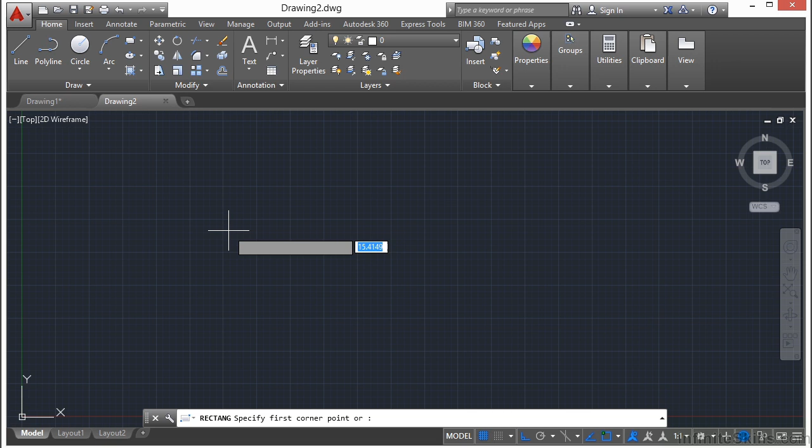Now we're going to start drawing a rectangle, and we're going to use the rectangle command. Just type in on your keyboard REC for rectangle. That's a little keyboard shortcut, and we'll talk about those again later on. This will be a way for you to use your commands in a shorter way so you can get to them much quicker. Press the Enter key. Now pick a point, any point on your screen, it doesn't matter where. That'll be our first corner for our rectangle.

Now we want to make this rectangle 50 units wide by 30 units tall. So you'll move to the right and up from where you first pointed. Type in the number 50, press the Tab key, that'll make it 50 units wide. Type in 30, and that'll make it 30 units tall, and press Enter.

Now take your mouse with the scroll wheel and double click that scroll wheel. This will do what's called a zoom extents. It zooms all the way out so you can see all of the line work in your file. If you scroll on that scroll wheel, that'll zoom in and out. You can also pan around in your file by clicking and holding that scroll wheel. So you're going to use that a lot: zoom in and out and pan, and the double click to zoom extents.

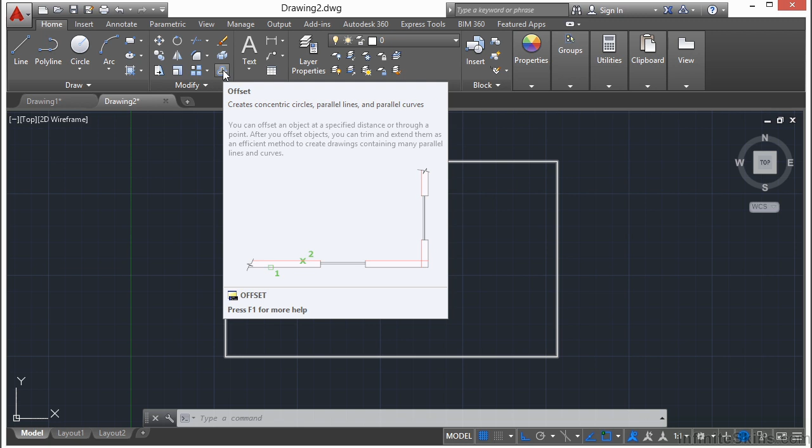Now we're going to offset this rectangle because we're going to build kind of a wall for a building here. We're just going to offset it 0.5 units to the inside. Come up here to the ribbon, go to the Modify tab, and go to this little button right here, that's called the Offset. You may have noticed that whenever you move your mouse over any of these commands, it gives you what's called a tool tip. It gives you the name of the command that icon represents.

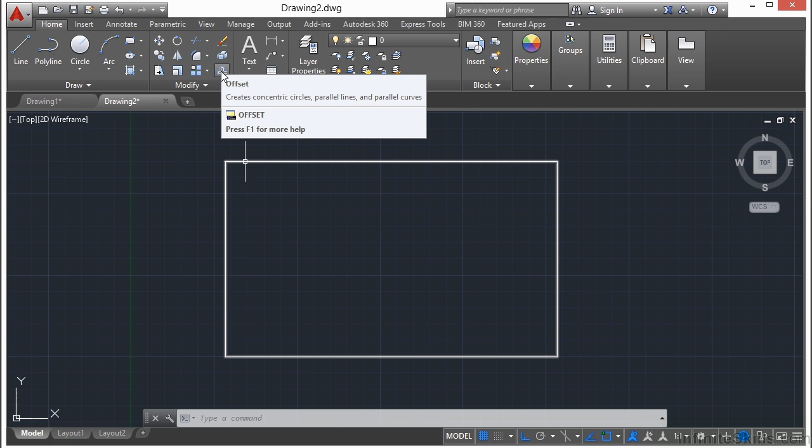If you wait a few more seconds, it'll give you a little tooltip telling you kind of how to use that command. So if you don't know what any of these buttons mean, you can learn them by slowly moving your mouse over them, and they will show you what the command is. So we want to use the offset command. Click it. Now we have to tell it the distance. Type in 0.5 for half of a unit, press the Enter key. Now when you hover over the line, it's going to highlight. We're going to select it. The highlight lets you know which line you've selected.

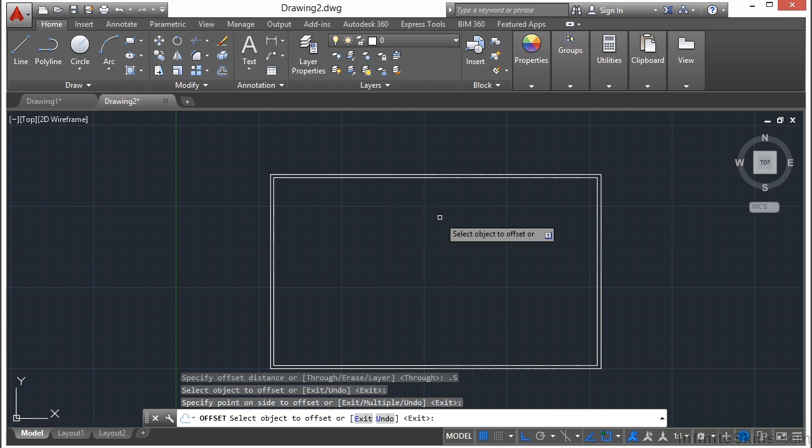I'm going to zoom in a little bit to show you what's going on here. You get a preview of what's going to happen when you're using your command. Where you put the mouse compared to the line you selected to offset, that's where it's going to offset to. I want it to go to the inside, so move your mouse down, to the inside of our rectangle, and left click. There you go, you've just made your first wall for your drawing.

Now to get out of a command, you can just press the Escape key. So there is our rectangle command and the offset command. You're going to use the offset command quite a bit.

Now we're going to open up a tool palette by pressing the Control key and the number 3 key both at the same time. So press Control and 3. This is a palette, specifically the tool palette, and it has a lot of different tabs on it, giving you access to a lot of different things.

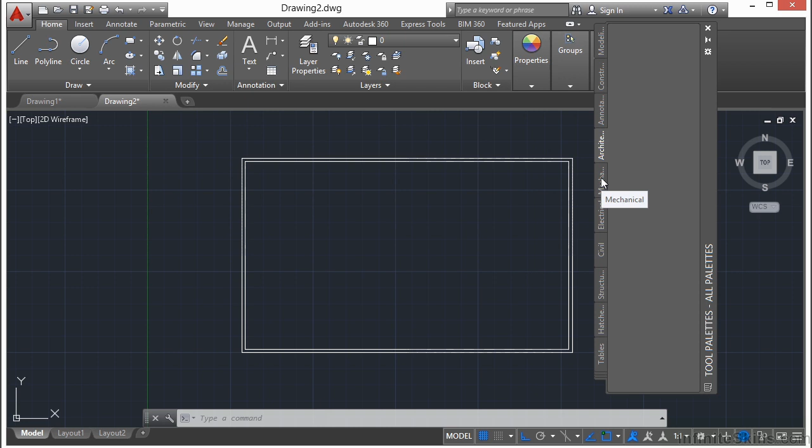Now what we want is to get a door, so we're going to pick Architectural, and we want this Door Imperial button right here. Click it, then move the mouse over into your options. You can see this door is a little big for what we have drawn, and that's okay.

Now what you're doing here is inserting a block. We'll talk about blocks later on, but a block is just a set of lines or text or anything you can create, saved together and set up as a block, so that you can easily reuse line work you've created before, for example like this door. So click somewhere on your screen, and that's where it's going to be inserted.

Now, this door is actually set up for architectural units, which means it's going to be working with inches for its units. We've set this up the way we're using our drawing now - we didn't set up units, but I'm using it in a way that it's using feet for its units. We'll talk about units and how they work in AutoCAD later on.

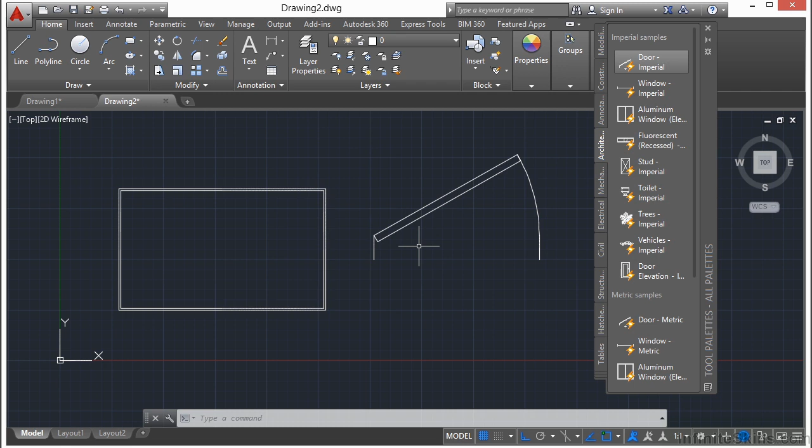Right now, we're going to scale the door, making it a little bit smaller. Type in SC for the scale command, press Enter. Select the door by moving the mouse right over the object and left clicking, and it'll turn highlighted blue once it's been picked. Once you've picked it, press Return, then just pick anywhere around here inside your door. You can see when you move your mouse, it's scaling it up, giving it a big number.

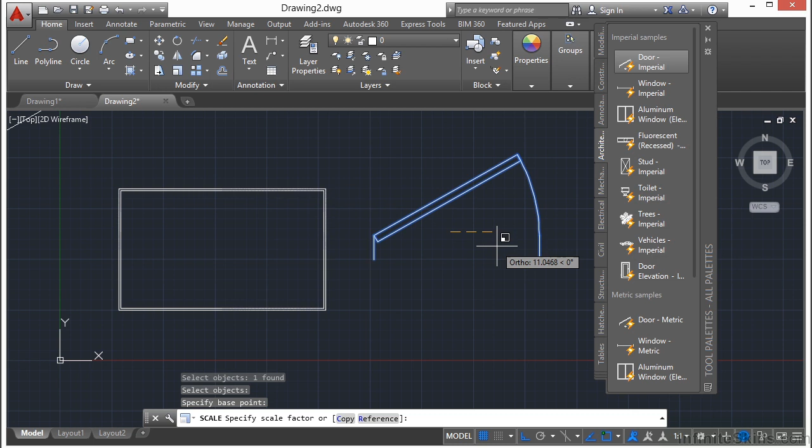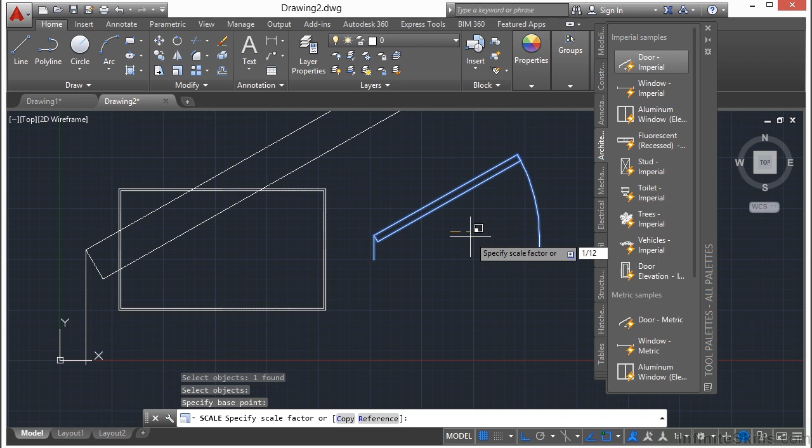Now the scale command works in a couple of different ways. If you give it a scale value greater than 1, the item is going to be bigger. If the scale value is less than 1, it's going to get smaller. And what we want to do now is type in 1/12 - we're scaling this by 1/12, going from inches to feet. Press Return. Now our door is normal size.

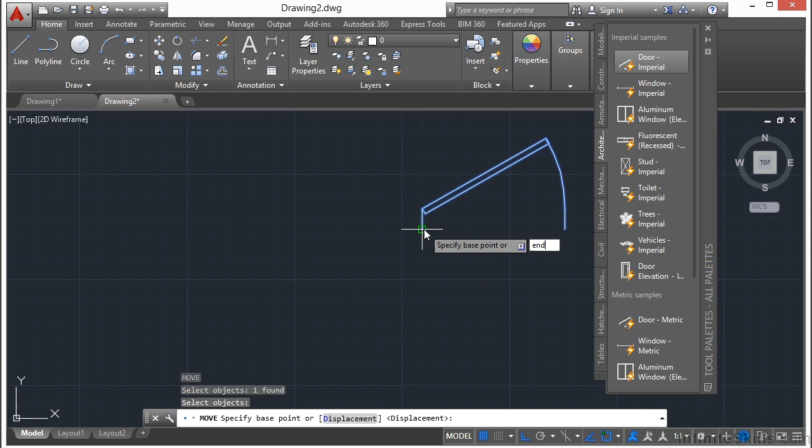Type M for move, press the Enter key, pick the door, press Enter again, zoom in with your scroll wheel, and we're going to snap to this endpoint. So type in E-N-D on the command line, press Return, left click right there in the door. Now I'm going to zoom out with my scroll wheel and move this door around wherever I want it to. I'm going to pan - you can pan and zoom with the mouse while you're inside a command.

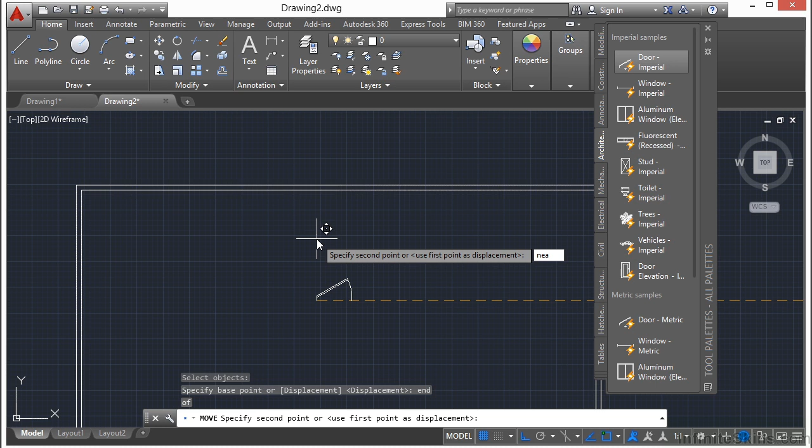Now type in NEA, this is another Osnap. We're going to talk about Osnaps later on in depth - snaps or Osnaps will force your line work to go into specific places on your other objects. Press Enter, then click anywhere on the inside wall. And so there we go, we've entered in our door.

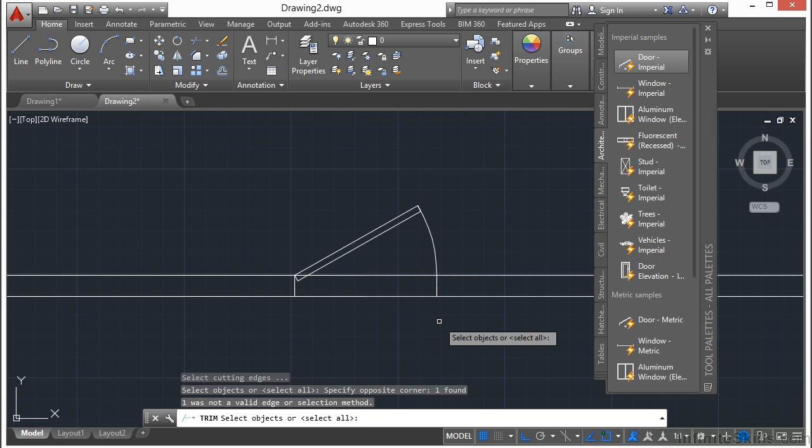So zoom in, center this on your page, and then let's type in the word trim, T-R-I-M. Press Return, and we're going to do a window selection. Pick up here at the top left somewhere and drag your mouse to the right and down, and it should be a solid line with a blue area, and as you do that, it's going to pick that door. Left click again, press Return, and now we're going to click on these lines.

What we're doing is removing the lines from our work environment. So zoom in here and get this little line too - that was the trim command. Right click, press Enter to cancel the command, or press Escape. The trim command trims things away, it cuts things away for you.

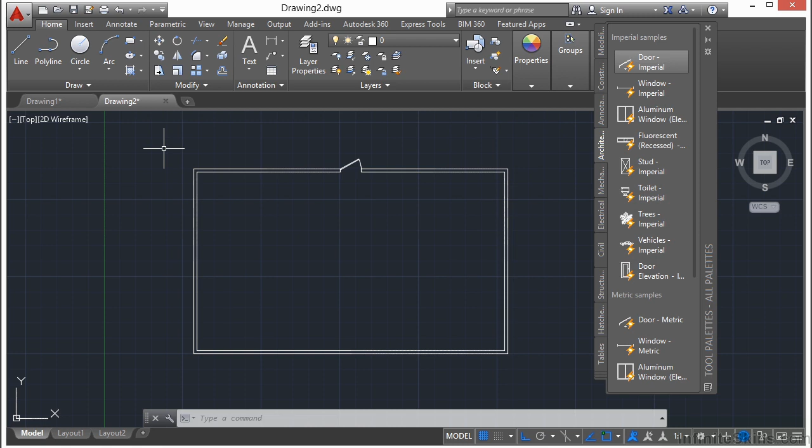So that's the very basics of AutoCAD. There are a lot of different little tools that we use there, but these are tools and a process that you're going to use all the time in AutoCAD. It's actually that simple. It may seem overwhelming to you right now, but that's okay. We're going to break all of these things down and look at them one at a time and go into details on how to use them and when to use them, and we're going to do that in this video.